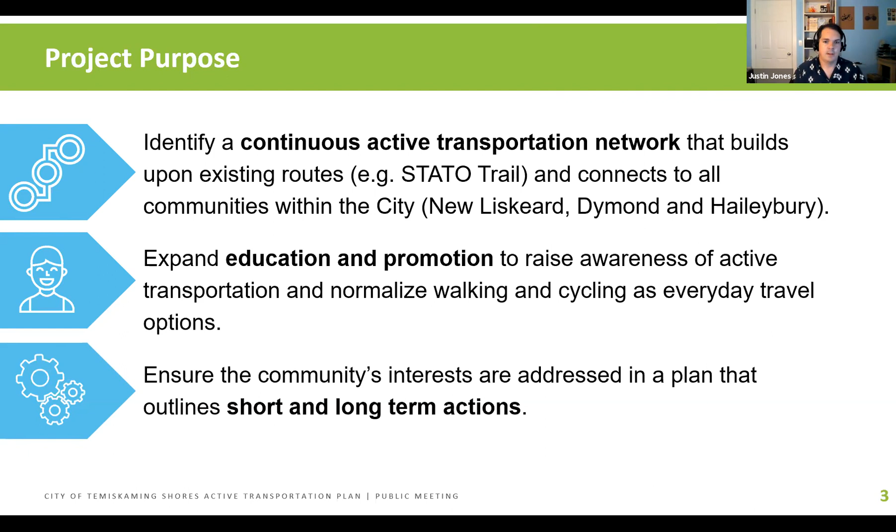Not entirely sure why it's not skipping ahead.

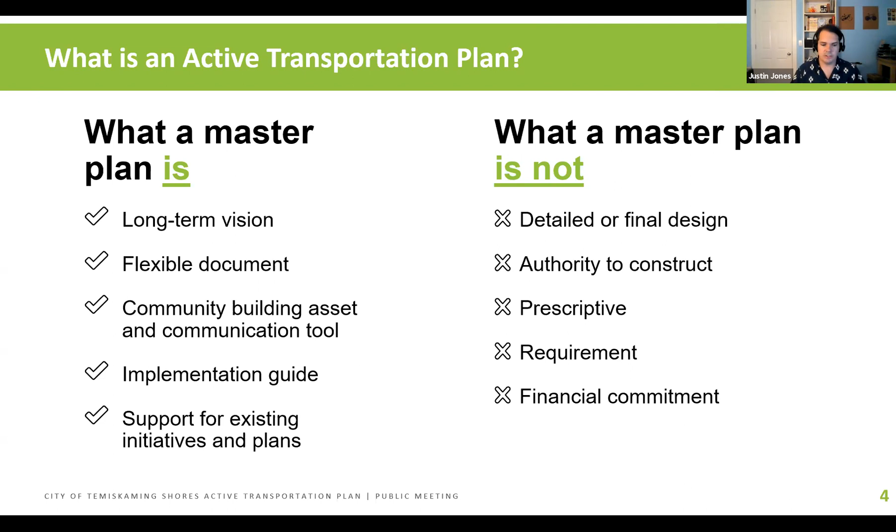So in terms of engagement, what's been completed to date is we've held a kickoff meeting, we've held interviews with key stakeholders from around the community, we've reviewed and mapped existing conditions, we've identified potential locations for improvement, including talking to the community about the hot spots and the places that they'd most like to see investments.

We've launched an online survey. We've attended different meetings in terms of active school travel and discussions with Public Works Committee. We did our stakeholder workshop, and then we've had another stakeholder workshop, which was used to help refine our programming recommendations, which we'll get to near the end of this presentation.

We also undertook a policy review. So as I mentioned, an active transportation plan sits within the overall policy of the municipality. And in this instance, we looked at the official plan, the recreation master plan, the age-friendly community plan, the greenhouse gas reduction plan, and a few others, the cultural plan that's there. And so we really looked to see how we could situate the active transportation plan within the objectives that the city has already agreed to within these previous documents.

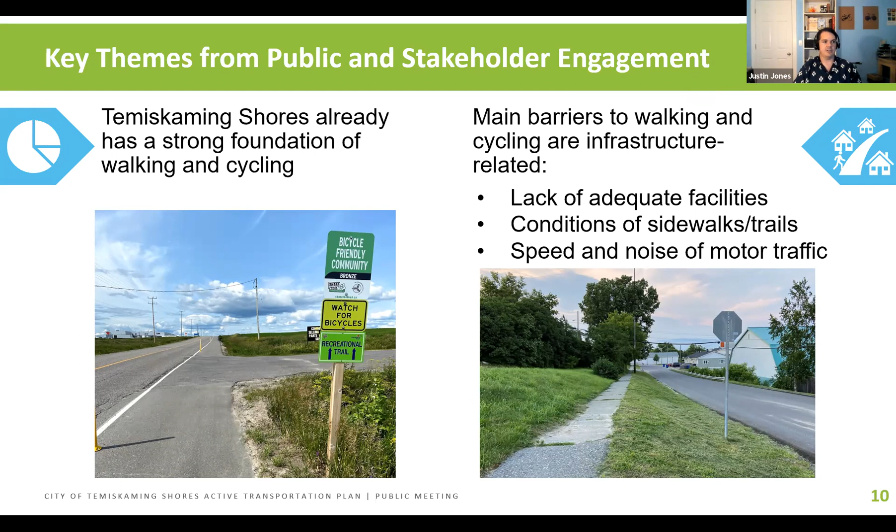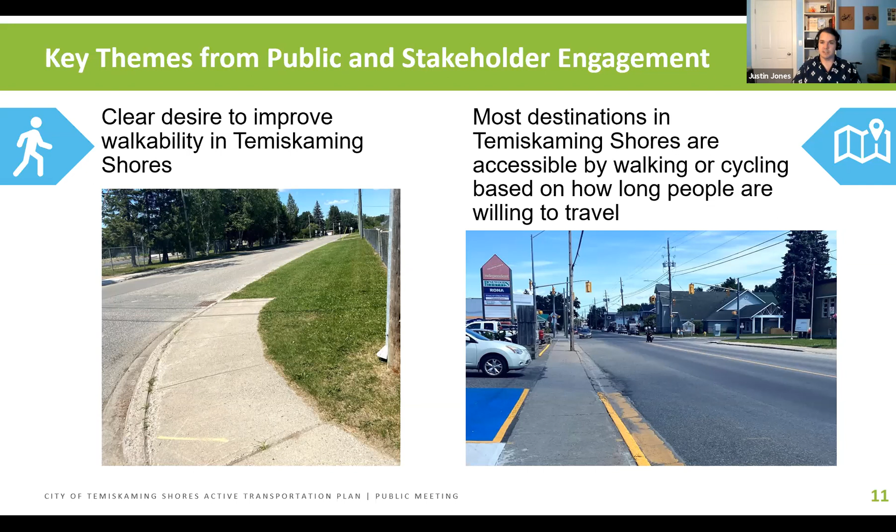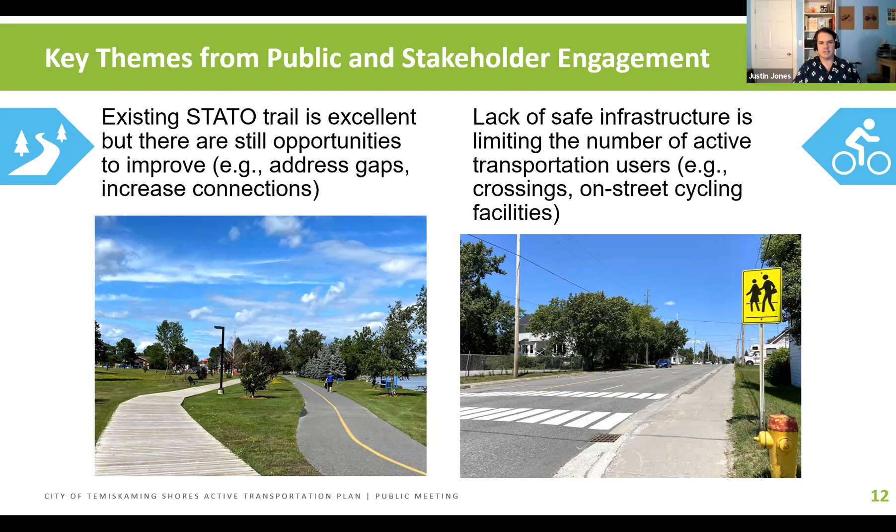A couple more key themes, and these won't come as a surprise. Really, the existing STATO Trail is a foundation, and it's an excellent amenity for the community. But there's still some opportunities to improve. So address some of those gaps, increase the connectivity, and really get people from where they are to where they want to go. And related directly to that is a lack of safe infrastructure, and it's really limiting the number of active transportation users. So the crossings and on-street cycling facilities were identified as key priorities for us to look at as we move forward.

And I think that one of the things that has been shown, as some of the spaces that have previously been dedicated to cars during the pandemic, as some of the bump outs and sidewalk extensions and different things have moved forward, one of the things that's really demonstrated is that when you reconsider how public space is used, particularly in the most vibrant part of your community, especially in your downtown, when you start to rededicate some of that space to active transportation or to spaces for people, it provides vitality for that entire community. It really does provide benefits that reach beyond just providing some additional seating. It provides some vitality, it provides eyes on the street, and it provides a reason for people to stop and stay and linger and enjoy the downtowns of the City of Temiskaming Shores.

So those are kind of the themes that we heard from the engagement. I just want to take a moment and just make sure there's no questions or any comments here before I move on and we start talking about the network.

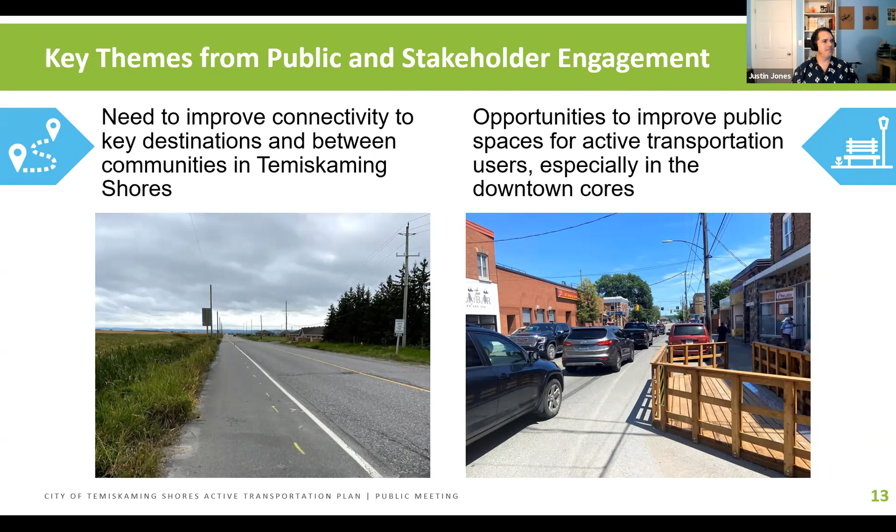So moving on to talking a little bit about our active transportation network and the way that we've structured the network development process. So the way that we structured the network development process is based on Ontario-wide best practice. So, the recently released Ontario Traffic Manual Book 18 is the design guide for cycling facilities in Ontario.

And I mean, not to toot our horn too loudly, but we wrote the book. Dave was the lead for the team that put that document together. So there's very few people in the province that are more familiar with the recommendations from that document than the folks on our team. And so we're really looking at taking those recommendations from that guidebook and operationalizing them for the City of Temiskaming Shores.

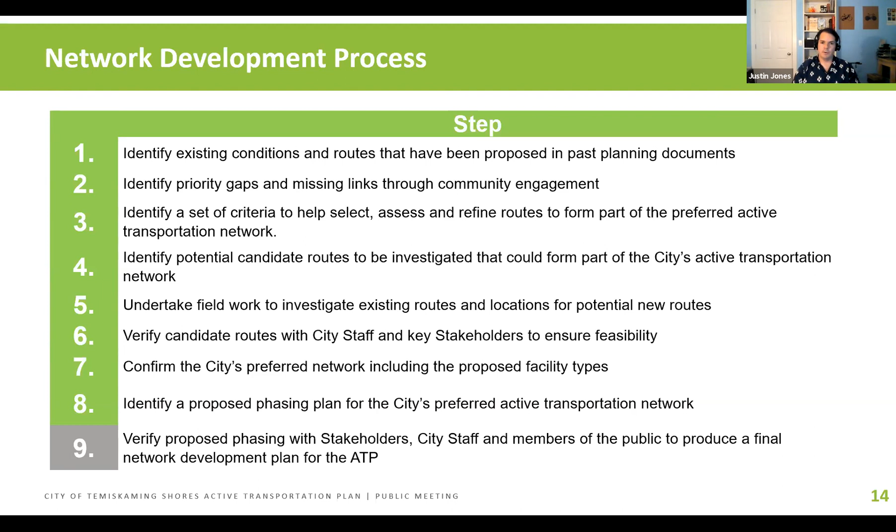So the way that we have done that is through a 9-step process that relies on both technical work, evaluating the network from a technical standpoint, so looking at traffic volumes, speed, roadway width, and then also from a standpoint of engagement and talking to the community and trying to understand what the priorities are. So the first step of knowing where you want to go is, of course, knowing where you are. So the first step of our process is to identify existing conditions.

And so when we looked at the existing conditions for the municipality, we saw that they have 43.5 kilometers of off-road multi-use paths. So that includes the STATO Trail, as well as the trail networks in Devil's Rock and Pete's Dam. They have about 0.1 kilometers of signed routes and sharrow markings, and there's 36.5 kilometers of sidewalk throughout the City of Temiskaming Shores, primarily in New Liskeard, Haileybury, and North Cobalt. We have Dymond listed here, even though there are no sidewalks in Dymond, but we just wanted to highlight that we were also considering that, and it's in our recommendations.

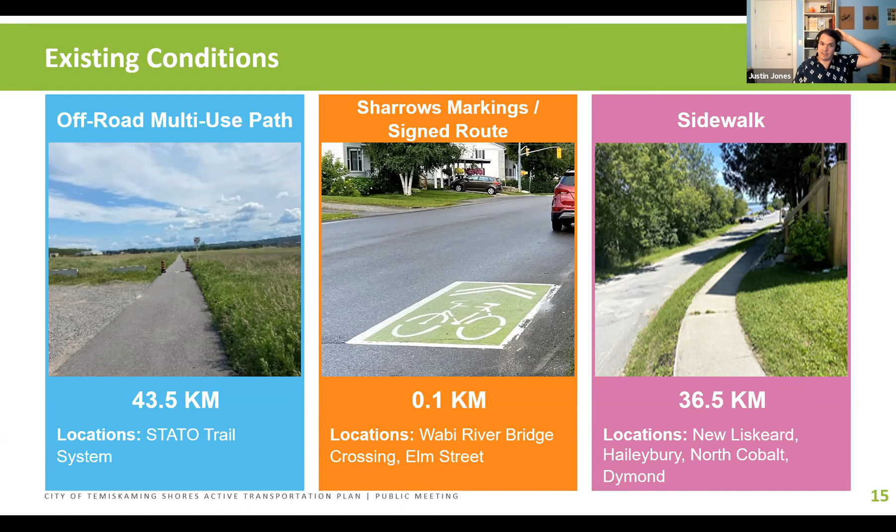So we then moved on to our route selection criteria. So these will look a lot similar to the goals of the plan that I talked about earlier when I was talking about the vision and the objectives. Our route selection criteria were based on consultation with stakeholders. And we identified things like safety, community connections, feasibility, servicing demand, connecting the STATO Trail, and providing scenic routes. So a lot of these were the criteria through which we were looking at the different routes and trying to understand where they should be prioritized, and even if they should be prioritized at all, given the feasibility, the cost, and the potential demands that they would be servicing.

So once we had that done, then we went out and did both desktop and field investigations. So desktop investigations basically refers to us using Google Street View to go around and see if we can get a bit of a flavor for the existing conditions. And then to supplement that, we went out and took more than 200 photos of different facilities and different conditions within the City of Temiskaming Shores. So we really covered the entire community, everywhere from Pete's Dam all the way down to Devil's Rock Park and everything in between. So, as we do that, we start to identify the different corridors that are going to form the backbone of the network for the active transportation plan.

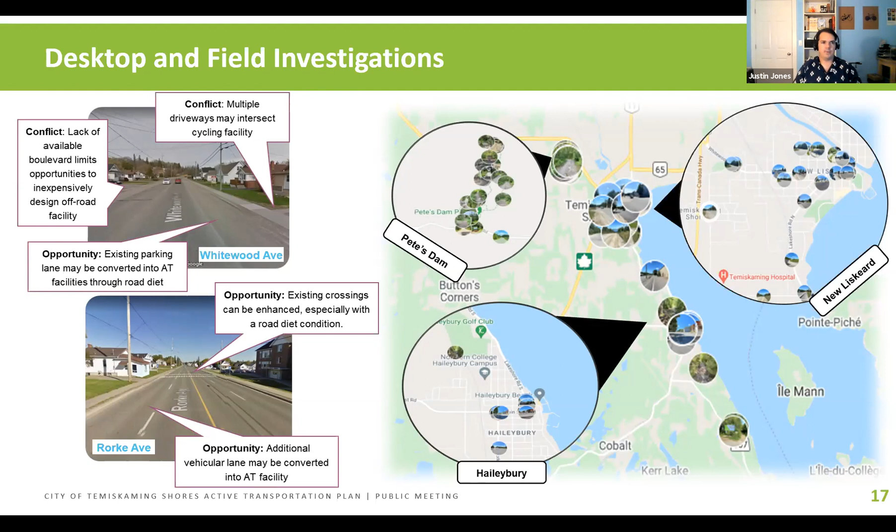So the next step is to run through what we call facility confirmation. So using the existing information that we have in terms of traffic volume, in terms of speed limit, we plug them into these what are called nomographs. And the nomographs are essentially just a chart that tells you, based on how many vehicles a day are using that road and how fast those vehicles are going, what type of facility is most appropriate for that condition.

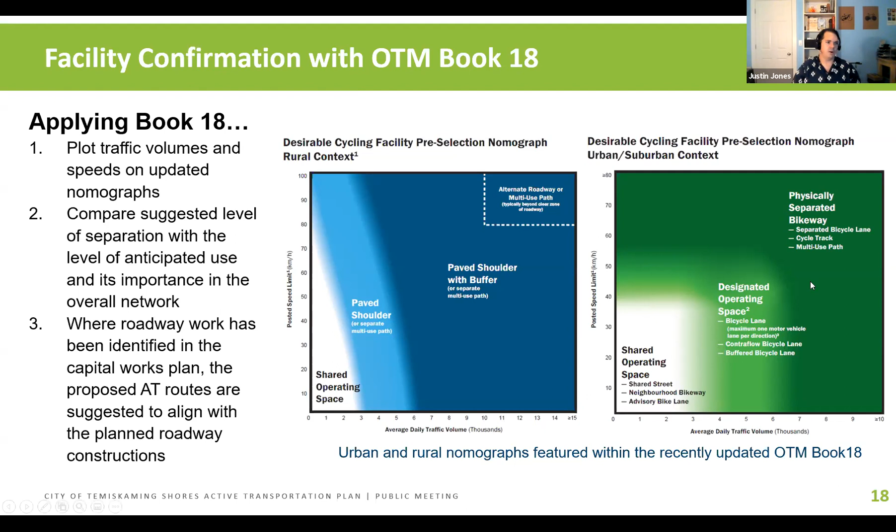So the design principles as we go through were that we were looking to design for all ages and abilities. So, we looked at the existing facilities that are there, the number of off-road, multi-use trails, the number of different facilities that do accommodate higher comfort cycling and walking. And we wanted to make sure that the connections that we were feeding into those types of facilities met that same level of comfort. We wanted to look at how motor vehicle speed influences cyclist safety. So opportunities to reduce speed on some of the priority corridors should be explored, especially to facilitate more of that all ages and abilities type infrastructure.

And then when in doubt, design for safety. So if we had a facility that was kind of on the border, if it was in that liminal space between one facility treatment and another, we pretty much always went for the higher type of treatment. We always went for a higher degree of safety.

We've been integrating complete streets planning and design. And what complete streets means is that where possible, you try and design for as many different types of road users given the available right of way as you can. So we are looking at trying to accommodate pedestrians, cyclists, motor vehicle users all in the same corridor in a safe and effective way, given the motor vehicle volumes that we saw and the available right of way width. So we've really been trying to take that complete streets approach.

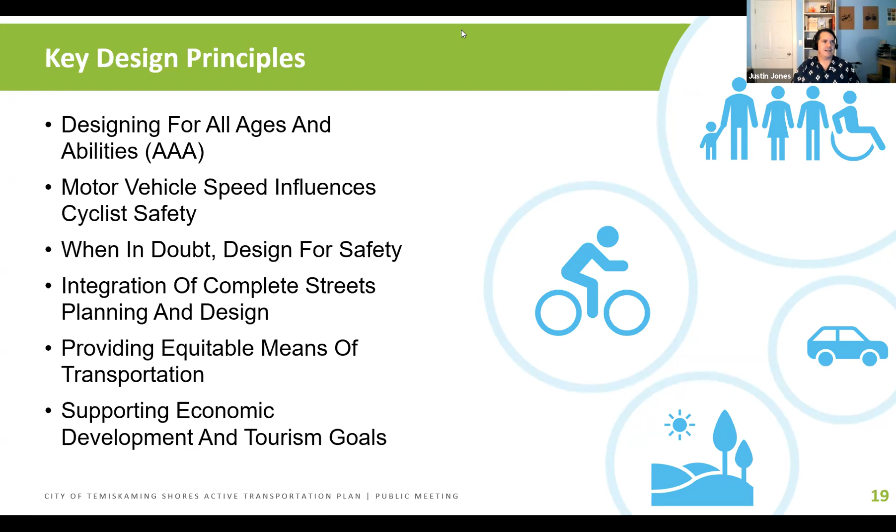So let's get to the good stuff. Let's talk about the network. So what we have done as we've gone through this process is, we have really looked at the entirety of the community of Temiskaming Shores, and we've looked at the ways that we can better connect the existing facilities. So as I've outlined before, we've identified about 80 kilometers of existing facilities, so that being your off-road multi-use trails, as well as your sidewalks. And we have identified the need for about 58.6 kilometers of new facilities to supplement those existing facilities to provide a complete, connected, all ages and abilities network that reaches all the way across the city.

The connections that are going to be made here are really going to connect every single part of the city to every single other part, and we're really excited about this type of network. It's pretty infrequent that when we come into a community and do a project and achieve the kind of connectivity that we're talking about, you would see the number of proposed kilometers be so much lower than the number of existing kilometers. I would say that it is a rarity for these types of plans.

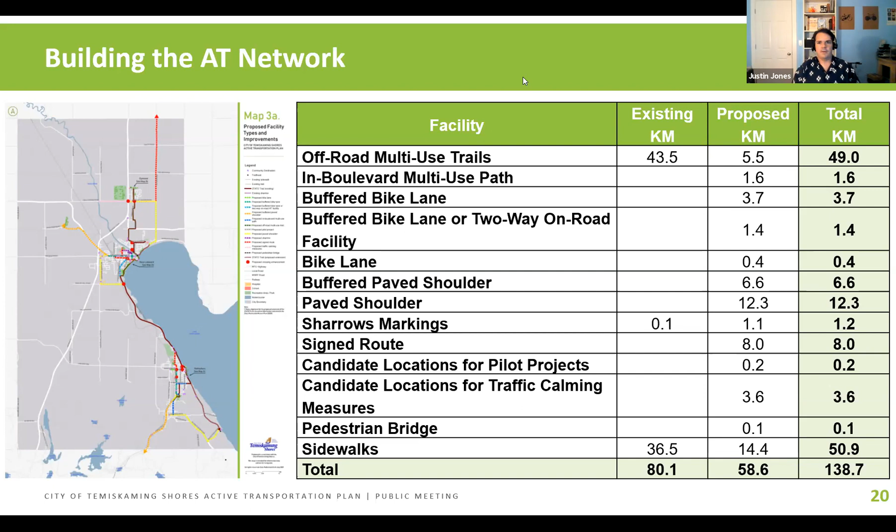So now we're going to take a minute and I just want to take us over to a tool called Miro. So I'm going to put a direct link in the chat. If you just want to click on it, you can. Okay, apparently my computer decided that it did not want to copy the URL, so I will have to redo that. Give me 1 second here.

And so the reason we're using Miro is that if you go into the chat, you can find it, or you can use the link there. And I will note for those that are watching the recording, the URL is case sensitive. So no capital T on Temiskaming, but you do have to capitalize ATP. So it is case sensitive. And so if you use that, you will be able to navigate to the Miro board.

So the Miro board is a tool that allows you to take a look, and I'll share my screen so that folks can see what it looks like. Give me 1 second here. So the Miro board, Matt, can you see my Miro? Yeah. Yep, I can see it.

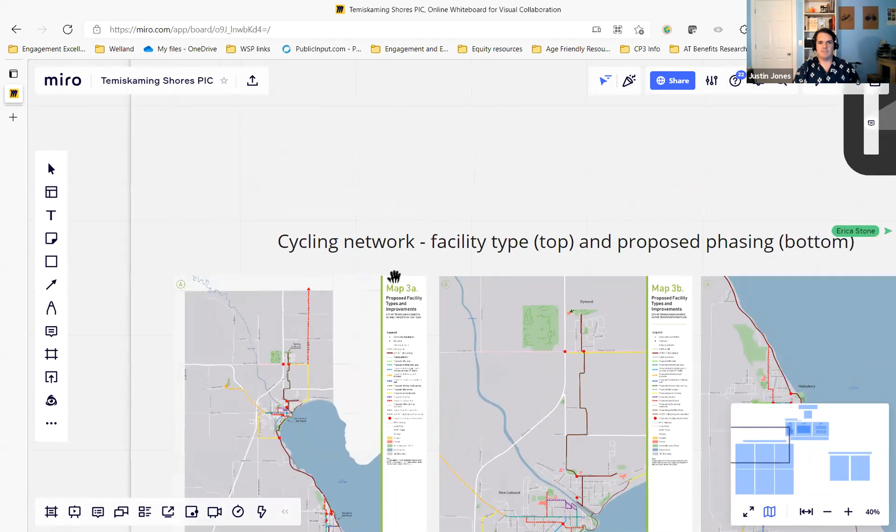Perfect. Okay. So the Miro tool is essentially an online virtual whiteboard, and it allows you to zoom in. And we've put all the maps up here. So the cycling network is the facility type, and then the proposed phasing. The facility type is up here on the top, and the proposed phasing is down here, highlighting the short and longer term priorities. And then over here is the new proposed sidewalks and trails, broken down by New Liskeard and Dymond, and then Haileybury over here. So you'll see where we're proposing new sidewalks and trails, so new walking facilities as well.

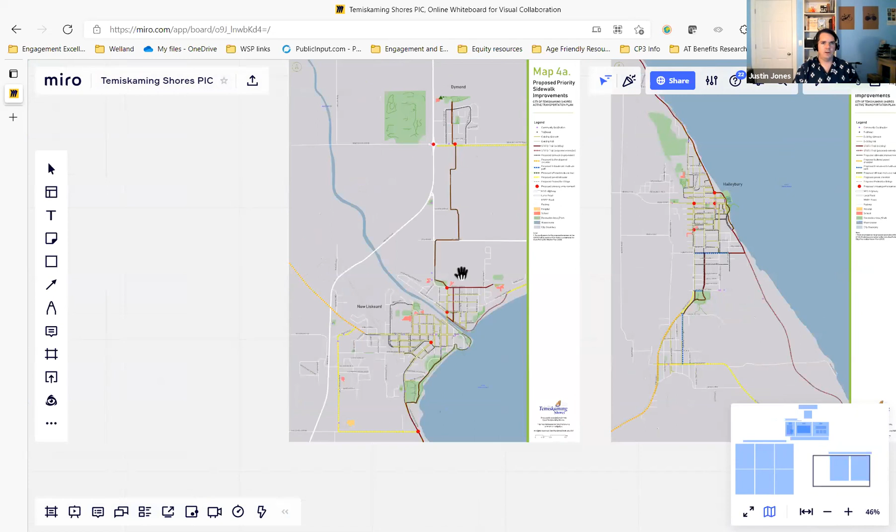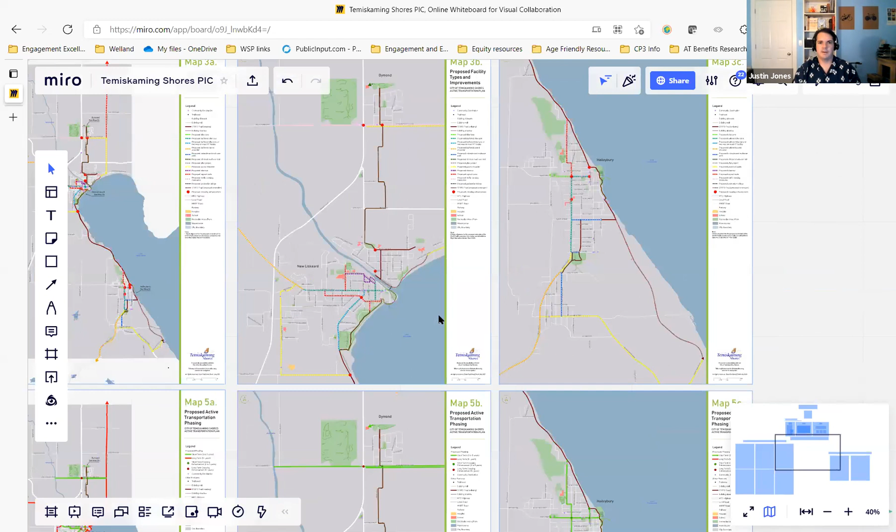And so what you can do using the Miro tool is use these comment tools here. On the left toolbar, you'll see a little speech bubble that says comment, and you can just click on that, drag the comment to wherever you want it to go and drop it, and then type your comment. So I am definitely a dog person, so I'm going to comment dogs there. And so you can comment on any of these maps and let us know what you think, what's good, what's potentially problematic, what things we need to watch out for as these elements get implemented.

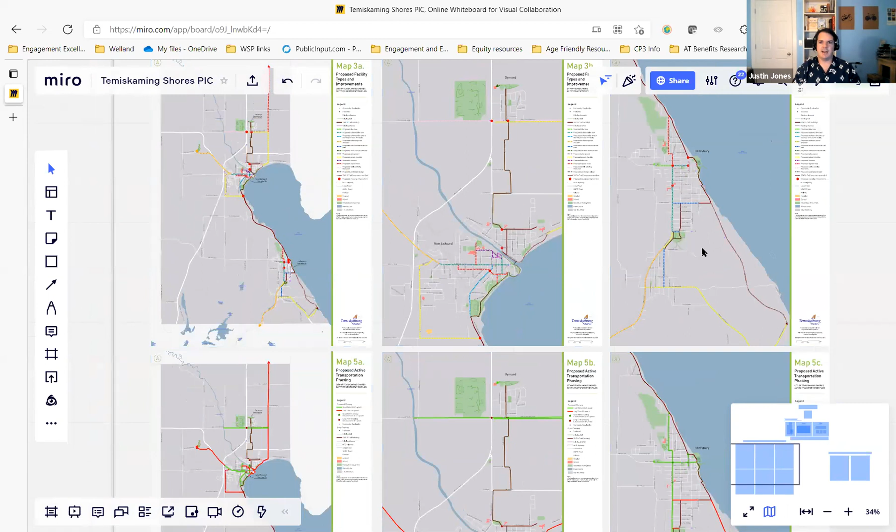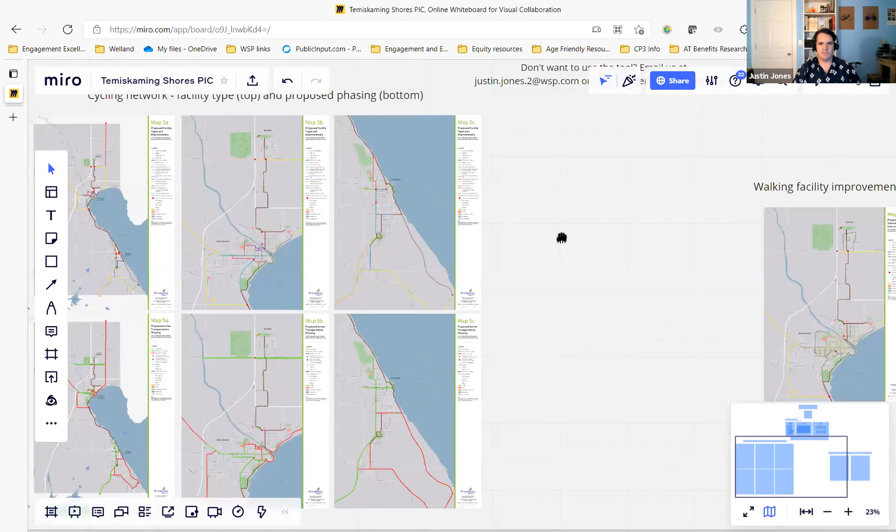So this should be locked, yeah? I think it's locked. So we're going to leave this live for the next 2 weeks for residents to be able to provide their feedback as we move towards finalization. So you can provide your comments, you could share this out to your network, and we will absolutely be looking for your feedback on these components. But we think that we've identified a pretty reasonable and a pretty effective network for the city of Temiskaming Shores.

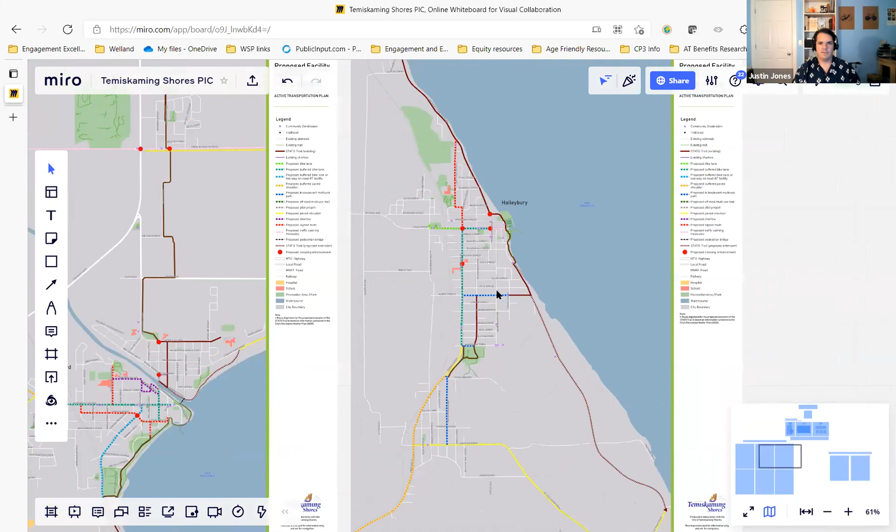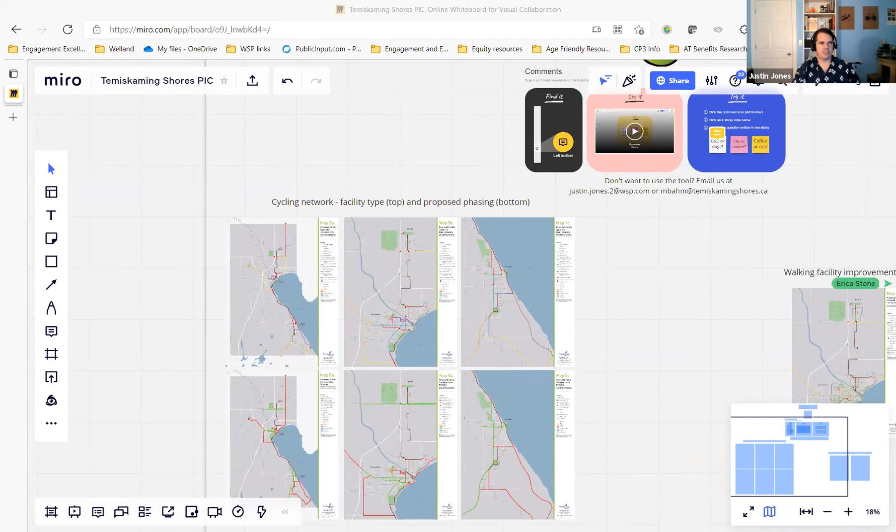So I'm going to pause the recording for a moment, and we'll just take a minute and let everyone explore the Miro boards for a couple minutes, and then we're going to move on. We'll have a couple more pieces of the network. We're going to talk about some of the design and some of the trails, but I just want to give everyone a minute to look at and digest some of the maps that we've posted here, because I know it's a lot of information. So I'm just going to pause the recording now.

So we're back recording. Just for those who are following along on the recording, we did have a brief discussion about potentially adjusting a crossing from Cecil and Rourke down to View and Rourke. We also talked about prioritizing the sidewalks along Rourke Street, and that was our primary discussion there. So we're going to move on, and we're going to talk a little bit about some of the other elements of the plan.

So this will definitely be the one that will likely get the most conversation going. We are suggesting, in particular, based on the feedback that we've received, the addition of buffered bike lanes on Whitewood Avenue, and we're suggesting the addition of additional pedestrian and amenity zones on Ferguson Avenue in Haileybury. So based on our assessment of Whitewood Avenue, what we've seen is that the roadway is wide enough to accommodate protected or bollard separated bike lanes on both sides of the road, and have parking still be maintained on one side of the road.

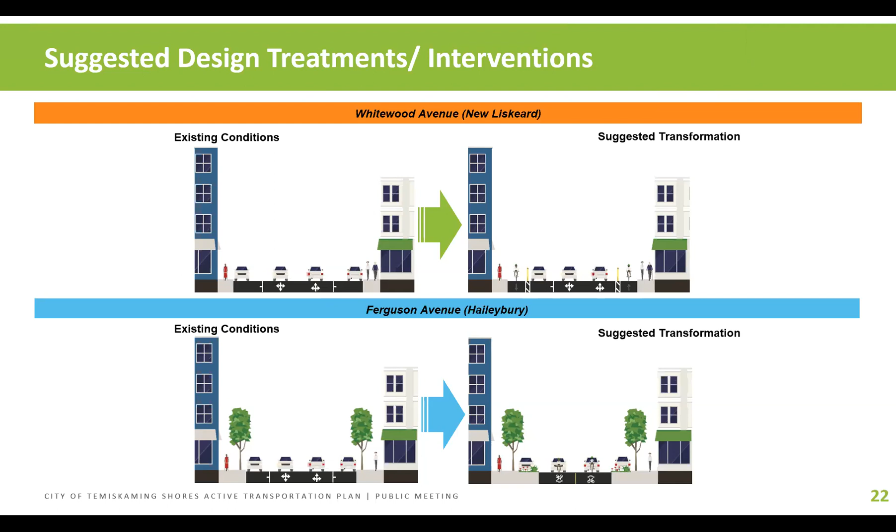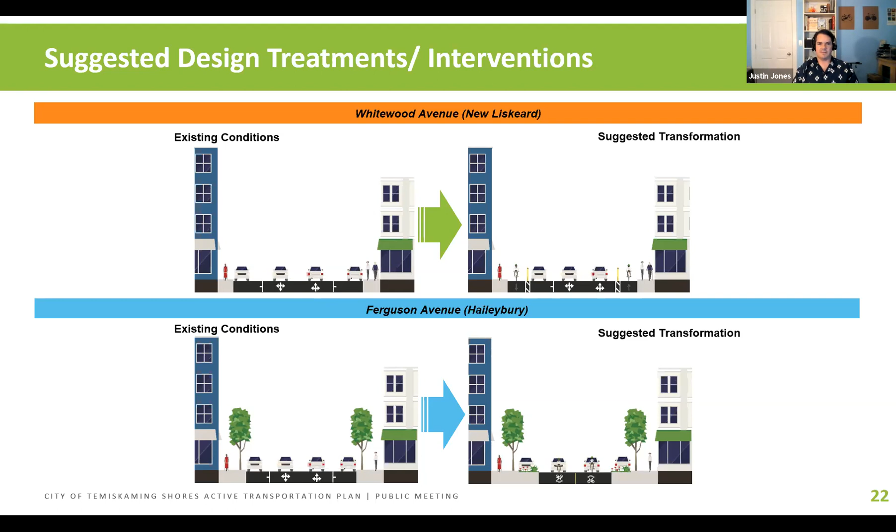Thank you. All right, I'm going to continue on to the other part that's likely going to generate some conversation. Matt, you got something to say? Well, we just had a couple questions come in the chat. Oh, sure. I'll grab those first, maybe. Mm-hmm.

So how will the plan take the condition of existing sidewalks into consideration? For example, there's a sidewalk marked on the maps on Browning between Georgina and 11B, but the condition of the sidewalk is quite bad. So we definitely did not have the time and available scope to go out and do a full sidewalk conditions assessment. We did hear through our consultation that the existing conditions of the sidewalks in the community are quite poor. And so one of the policy recommendations would be a sidewalk facilities assessment, to really look at the way that the sidewalks have been prioritized and start to look at how those can be revitalized as the city continues.

So I see, should they make it safer for walkers in the winter before they try to plow for bikes? I think it's definitely not an either or. We think it's a both and discussion when it comes to maintaining more effectively in the winter. We would really prefer not to see it come down to an argument about whether or not cycling facilities should be maintained in the winter when sidewalk facilities are not.

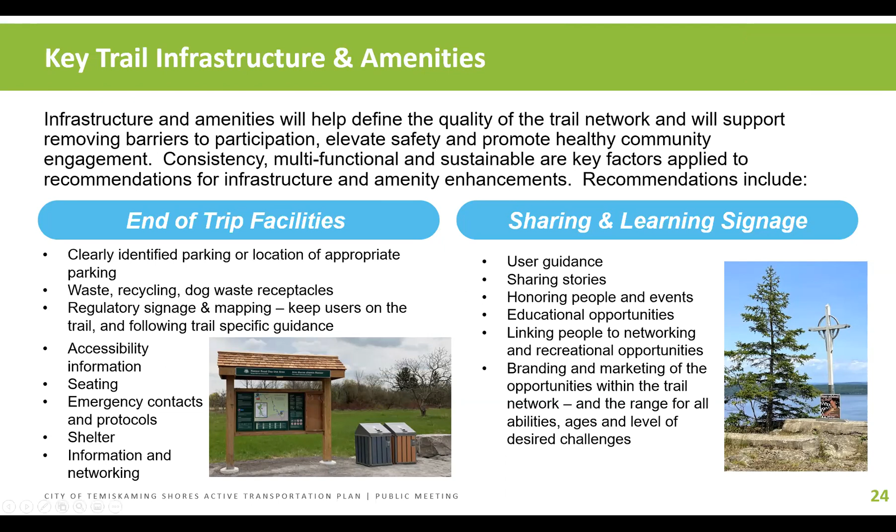So in addition to the public-facing infrastructure, there are a list of recommendations that will help maintenance and operations of the trail as well, and things that will start to foster efficiencies and offer opportunities to be more responsive with some of the maintenance rather than regular inspections and working off of catching things at regular intervals.

Besides those elements, the additional sort of public-facing aspects that we're looking at, rest and refuge. So we have recommendations for formal and informal seating nodes, especially at approximately 200-meter intervals and at vistas. Informal seating, so rocks at greater intervals along steep slopes to aid accessibility. We know it's really important for people to feel that they're able to use a trail to have those moments where they can pause. Shelters to offer respites from sun, wind, and rain, and a place to muster. Lit trail sections or lit refuge points where evening use is encouraged or desired.

Maintenance and mobility, bike repair stations are a really important aspect, especially on some of the more rugged trails that you have where incidences can occur. Looking at the potential as the interest grows for e-bike charging stations and to support those power aided users, and even USB and other plugs and even Wi-Fi where appropriate to capture the interest of some of those more tech crazed users, the people we can't get out to be fit, thinking about alternative ways that we can interest them in coming onto the trail.

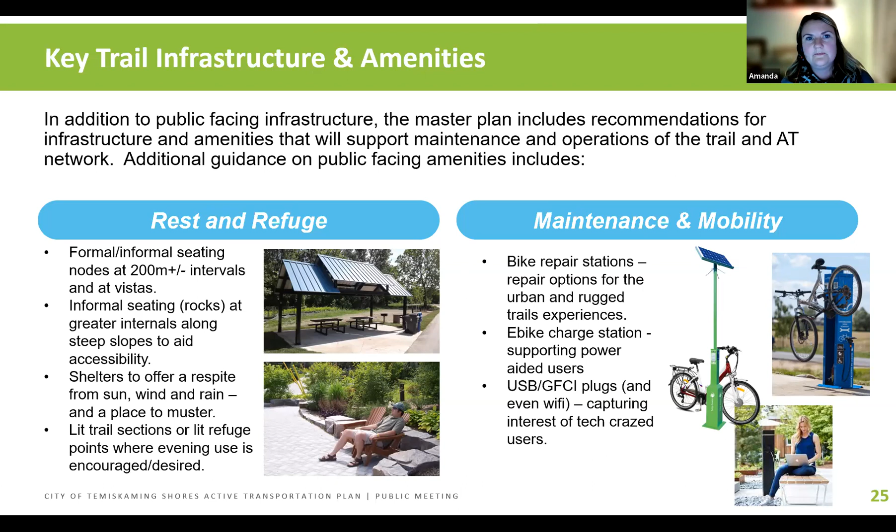Safety and accessibility, so important. Wilderness trails, they can conform to some accessibility standards and still maintain their character and opportunities for challenge. We don't need to flatten them out. We can reduce some uneven surfaces and slopes where possible, but really provide supportive amenities and enable users with tools to be able to make this more an inclusive, safe trail system.

So some of those tools that we're recommending include minor grading improvements to surfacing and trying to divert the drainage so they're not coming down the trail and continuing to rut away that trail surfacing. Infill surfacing to elevate and smooth the trails, especially on those places that are quite rocky, like if you look at some of the more wilderness trails that you have. Railings, bike access ramps, and landing breaks within some of those steep slopes, and also some seats along those. So if someone is challenged going up those more tricky areas, they can have a rest at the top and bottom.

Signage to communicate the specific challenges. Very important in terms of accessibility that we communicate elevation gain, where those challenges are so people can choose to avoid them, what types of challenges those are. So really describing those so users can come to the trail, understand where those are, and then hopefully open up the doors that they'll be able to use the trail more because they can pick those challenges.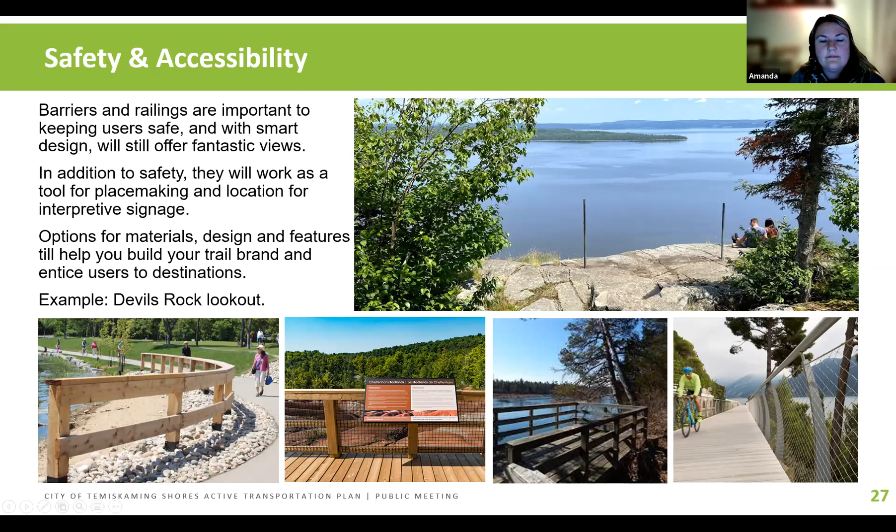And then just addressing problem areas. So we want to establish sustainable trail design and minimize the maintenance, reducing those liability risks and improving the user experience. Mitigating those reoccurring issues through limiting and avoiding adverse impacts. So thinking about Pete's Dam, someone mentioned maintenance programs and what are we going to do? We're making recommendations to talk about changing those trail facilities so there's not those continued washouts, there's not trails underwater as often, understanding that will happen.

So looking at structure design, so elevating the trails in low areas where we can, utilizing retaining stones and culverts to convey that water when it does move underneath. Reinforcing the trail surfacing with geogrid cells to manage erosion and create sustainable trail use. There's some really great products that even when underwater soaked, you can still wheel across that trail surface, and it really holds it in place. So that way, when the water does finally recede, you still have your trail system in place and it's usable. Whereas right now, there's a lot of trails that do wash out and they create big ruts, and they're really hard to use after that water recedes.

And then looking at installing structures when we've got a problem that constantly washes out, we do need to look at whether a small pedestrian bridge is really the answer, or a boardwalk system that is going to give it a little bit more longevity, so we're not always coming back, maintaining those trail sections, or concerned about safety on those areas.

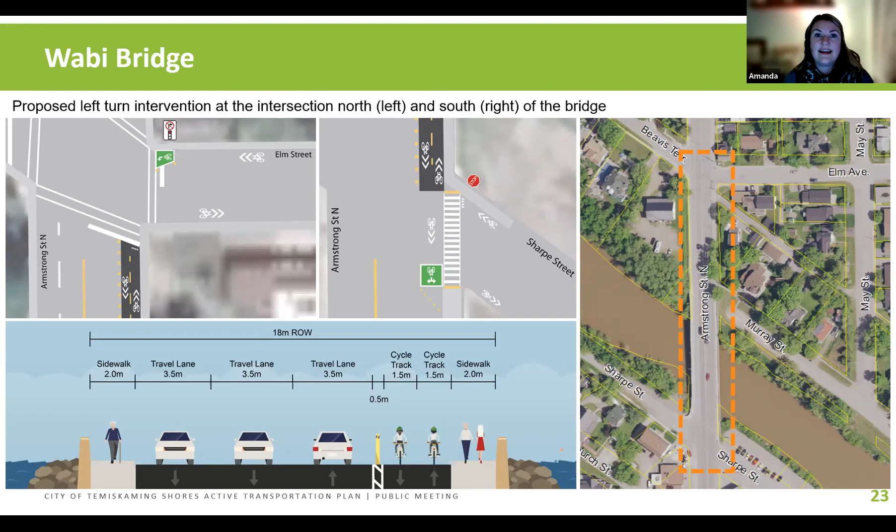So that way, there's a lot of trails we can't have staff necessarily patrolling or monitoring on a regular basis, although that should be done as well. But getting the community to help report on those trail systems and having a dashboard system to really sort that information and deploy resources to certain areas can be really helpful to maximizing efficiencies in terms of maintenance resource dollars that are always sparse.

Great. So before I get to any of the other comments, I don't want to skip over it twice, because I think it's fairly pivotal. I wanted to talk a little bit about the Wabi Bridge. So we also recognize that the Armstrong Street Bridge is a major barrier to the Stato Trail. It is one of the pinch points in the network that really does create a gap along the Stato Trail. So really a bit of a disconnect between the solid all ages and abilities facilities to the south and to the north.

And so one of the things that we did was we looked at how we could potentially create a safer condition for that corridor. And based on the available information about traffic volumes, our recommendation for the short term is to provide a two-way protected facility along the east side of the Armstrong Street Bridge from Sharpe to Elm. So it'd be a relatively short stretch that wouldn't cross any intersections, and it would just provide that protected facility for people moving north and south along the Stato Trail to continue along their way

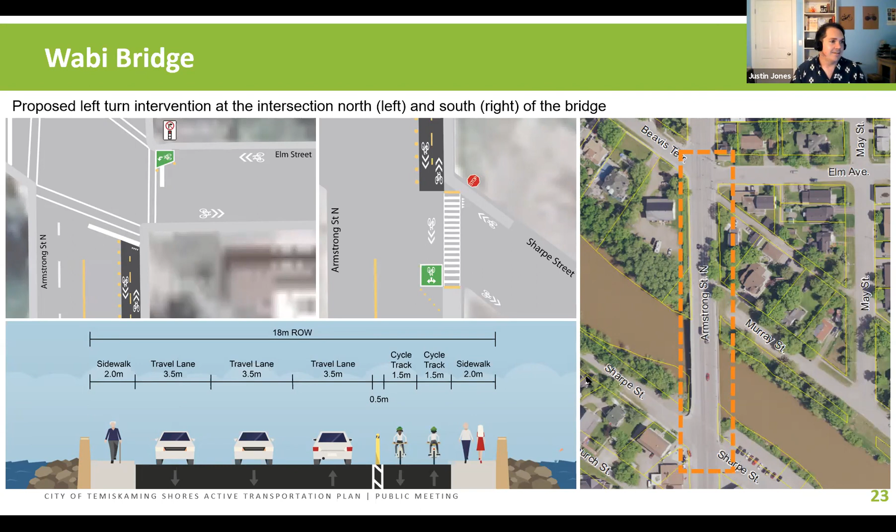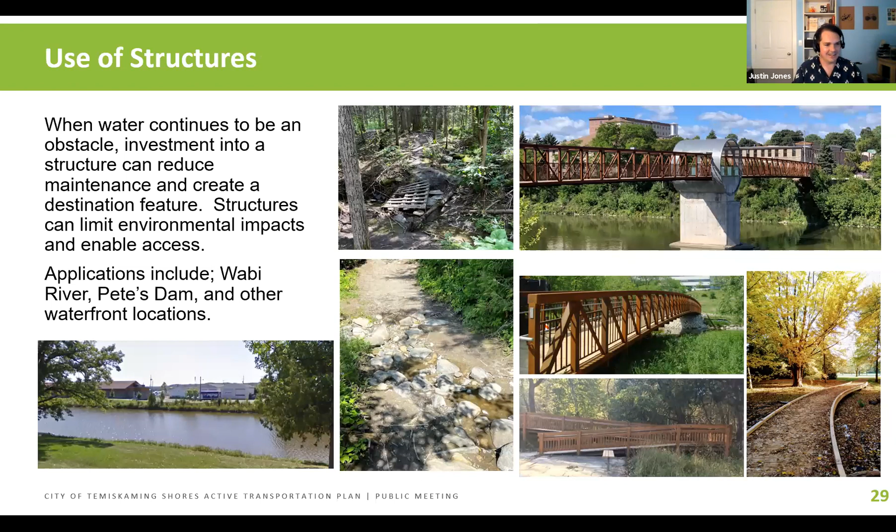So I do want to continue on, and now from all that to the cold hard numbers. So we're going to get into some of the costing here. When it comes to the short-term priorities, the short-term network, which is 0 to 5 years, we have phased about 19 kilometers in the short term at a cost of about $1.18 million. So this includes design costs, and it also includes some contingency costs.

So we're trying to make sure that we're being very conservative with our numbers. We would rather overestimate the costs than underestimate them. We'd rather you guys expect more and then have it come in under budget than you guys go in and have someone say, oh well, design or these materials have gone up or whatever.

The exciting thing about this number is that when it comes to the broader context of municipal capital spend and the amount of connectivity and infrastructure that this builds, this is a really tremendously low number to really connect the entire urban area of Temiskaming Shores.

And I just think that it's really exciting for a city like Temiskaming Shores to be able to build a complete connected network within all of their urban areas for about a $1 million price tag, especially in the environment where we are seeing different funding streams come out from different levels of government to support exactly these kinds of investments.

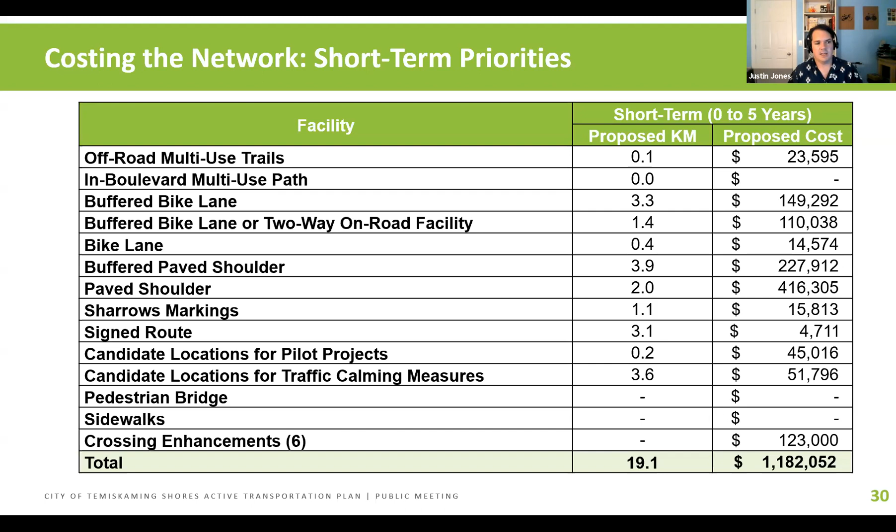What we are saying is that $14.6 million is a number of different grants and programs and transfer payments that the city of Temiskaming Shores should be seeking to fund these kinds of investments in the long term. So, we see this as a 20-year plan. And so when you compare the projects and proposals we're putting on the table to the transfer payments the city receives from the province and the funding available from both the federal and provincial governments, we do see this as an achievable plan

in the 20-year timeline. We see the 5-year timeline as an extremely achievable plan, and we think that it is certainly something that the city could hang their hat on in terms of saying that they now have a full all ages and abilities set of infrastructure within their community.